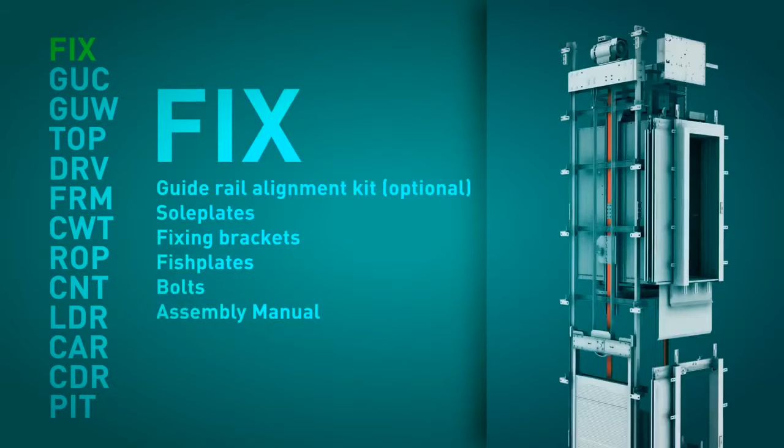Vita considers the installation of an elevator as a sequential assembling process of elevator subcomponents. It is for this reason that the parts of Vita's elevators are carefully sorted and supplied in modules. By module, we mean the group of components which, once assembled, carry out a specific function within the complete elevator.

Each module can be made up of one or more packages. These packages are identified with a description of the module and its position within the assembly sequence. The supply of the elevator has been designed to fit what we consider to be the logical assembly sequence of a machine roomless elevator.

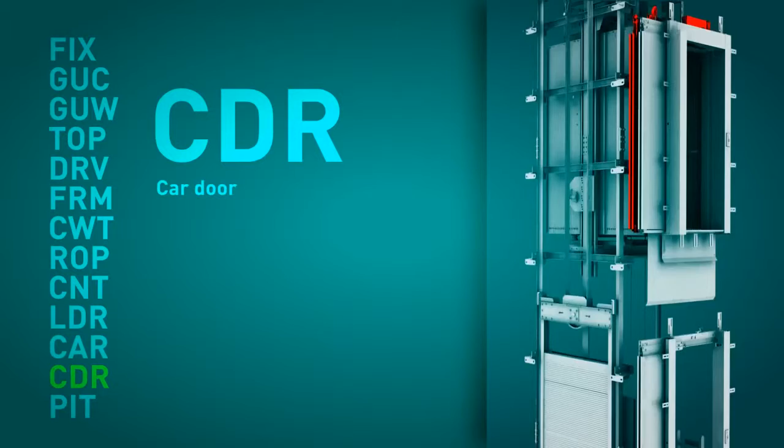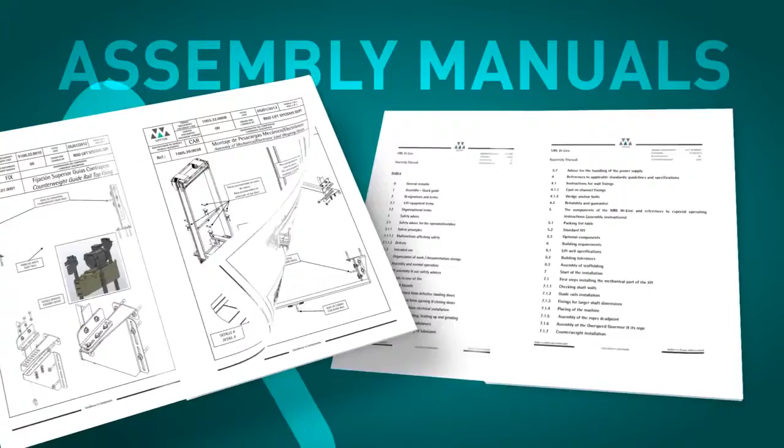The package that we have to open first is labelled and easily identifiable. Attached to this package, in a protective plastic cover, is the packing list and a document which details and lists the material supplied in each of the various modules. In this first package, we can find the assembly manual of the elevator and all the assembly handbooks of the individual components. Before starting the assembly process, we strongly recommend the assembly technicians read all the manuals in detail.

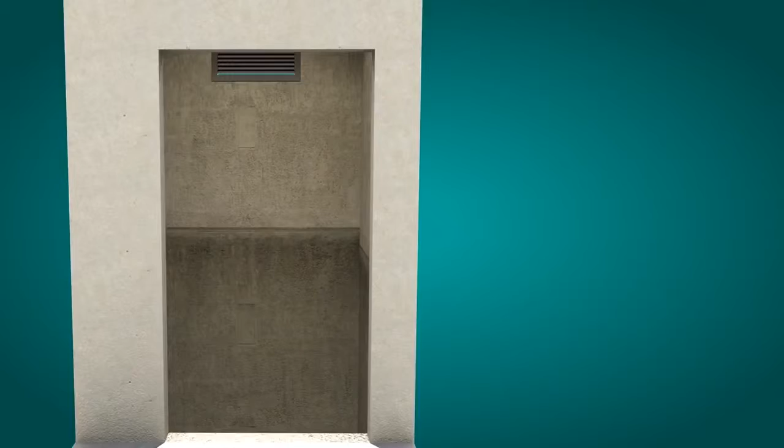The assembly of the MRL-W line starts by checking that the conditions of the shaft, dimensions, cleanliness are satisfactory and that all the necessary material and auxiliary tools are available on site. The guide rail sole plate must be correctly positioned and levelled according to the assembly manual.

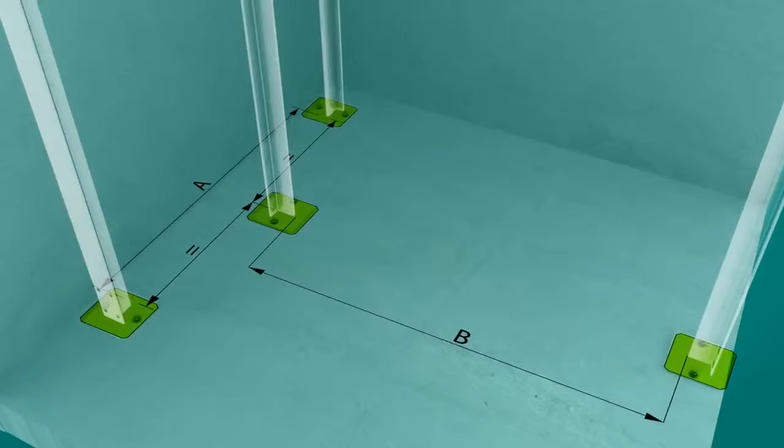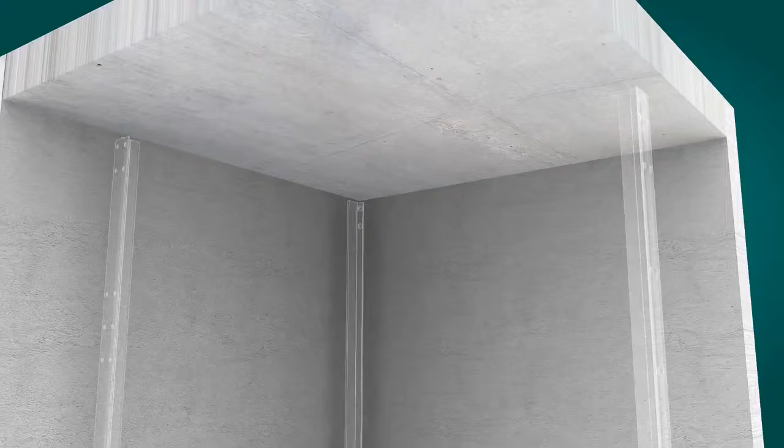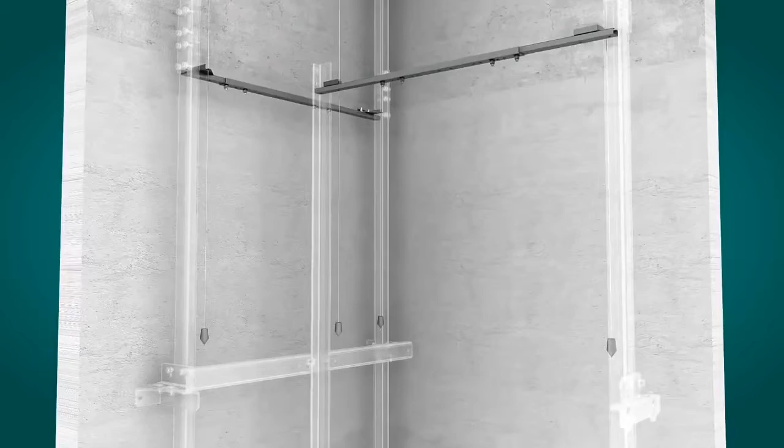The bottom portions of the car and counterweight guide rails are cut and assembled according to the installation drawings. Should there be a difference between the pit depth given in the installation drawings and the as-built depth, the bottom guide rail can be adjusted and cut to the right length. A tool to help align the guide rails is recommended in order to guarantee a correct assembly. Vita can supply a guide rail alignment kit upon request.

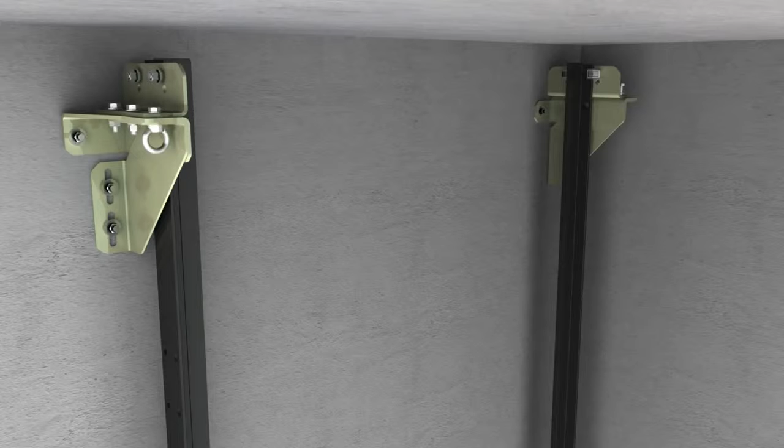The first row of guide rail supports is assembled. Their position is detailed in the installation manual. With the help of some scaffold platforms, the successive guide rail portions, 2.5 meters or 5 meters, are assembled with their corresponding support brackets. Once the last section of the counterweight guide rail has been assembled, the topmost bracket can be fixed into place. The last portion of the car guide rail fixed to the bed plate is assembled once the machine support has been installed.

Alternatively, the process of assembling the guide rails can be carried out from a temporary platform which is fixed to the guide rails that have already been mounted and lifted up through the shaft by means of a block and tackle.

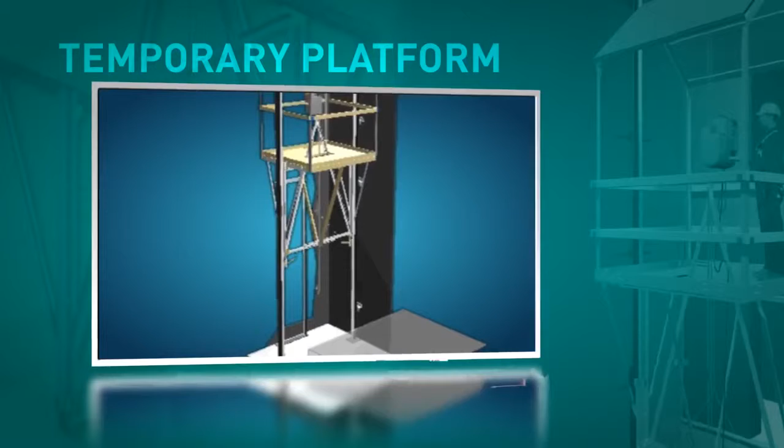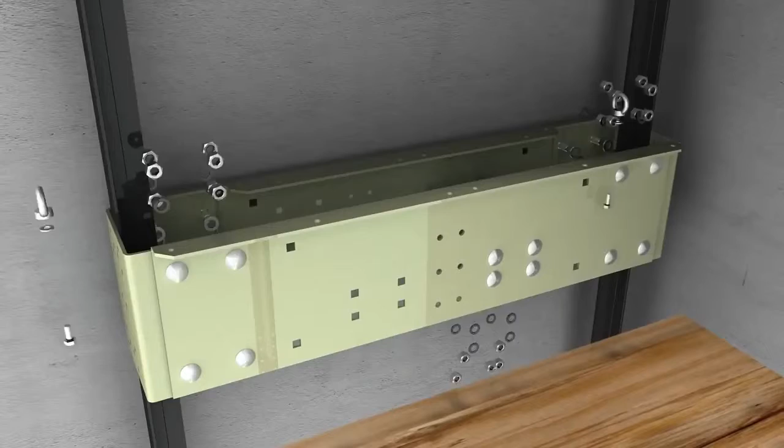The machine bed plate is assembled next. A comfort kit is standard supply for 1.6 meters per second, but optional, though highly recommended, for 1 meter per second. These low-frequency metallic cushions absorb any vibrations that the system may produce.

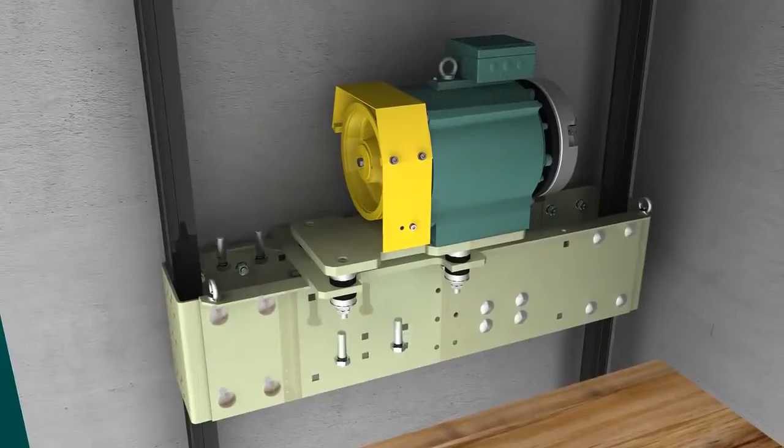The machine is fixed to its support and is lifted and guided into position with the help of a block and tackle. It is fixed to the sheave side with the fixings provided, and once the machine is level, these fixings and the clamp can be tightened. Once the machine is in place, the penultimate guide rail support and the last section of car guide rail fixed to the bed plate can be assembled.

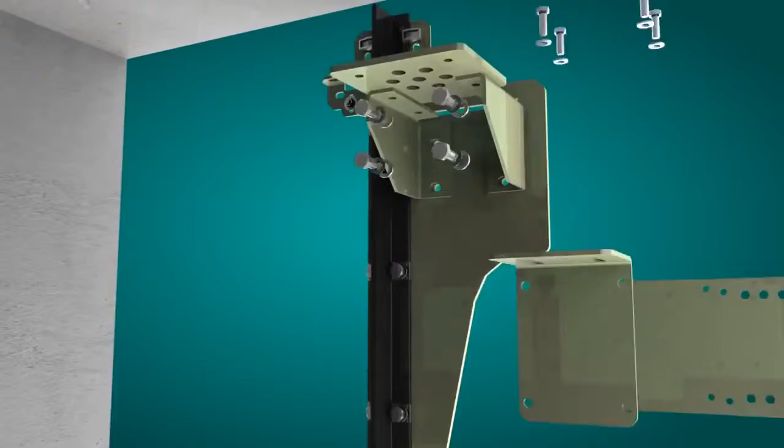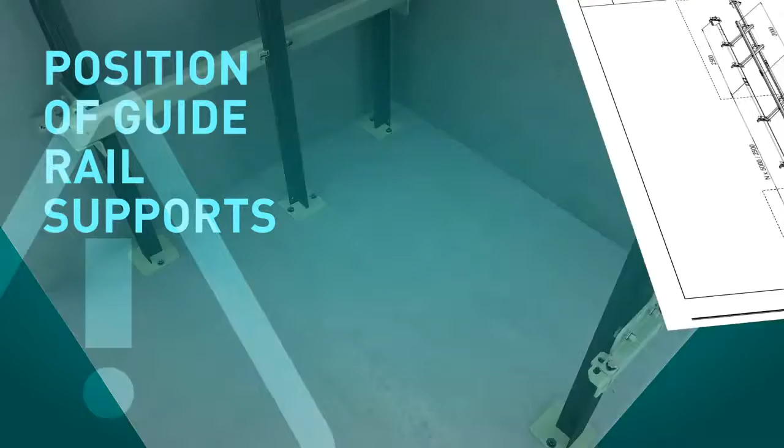The dead hitch point can now be assembled, followed by the overspeed governor and the slack cable control device, should it be applicable. At this point, all the mechanical elements of the elevator are assembled in the headroom. All the guide rail supports must be placed in the positions detailed in the installation drawings. The position of the top and bottom brackets is of special importance. Any scaffolding and platforms should be removed at this point.

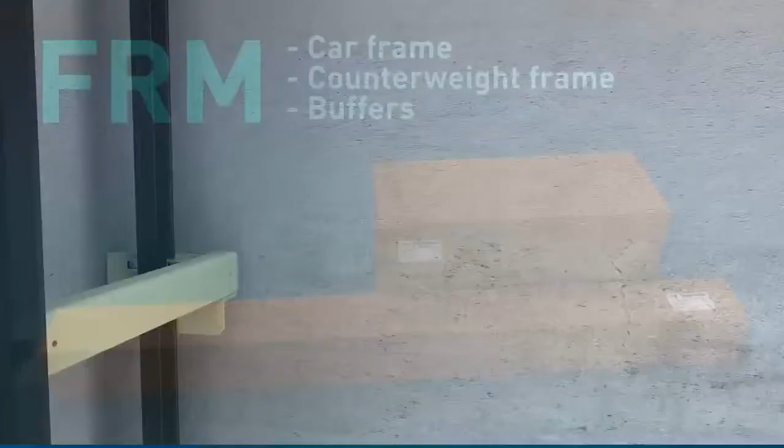It is now time to go into the pit. In the module FRM, we will find all the components relating to the car and counterweight frames and the buffers. The counterweight buffers should be assembled first of all in the position detailed in the installation drawings. Resting on its buffers, the counterweight frame is then assembled.

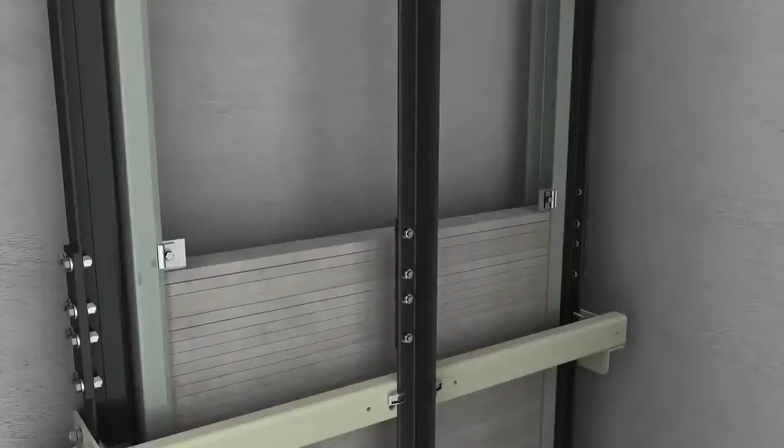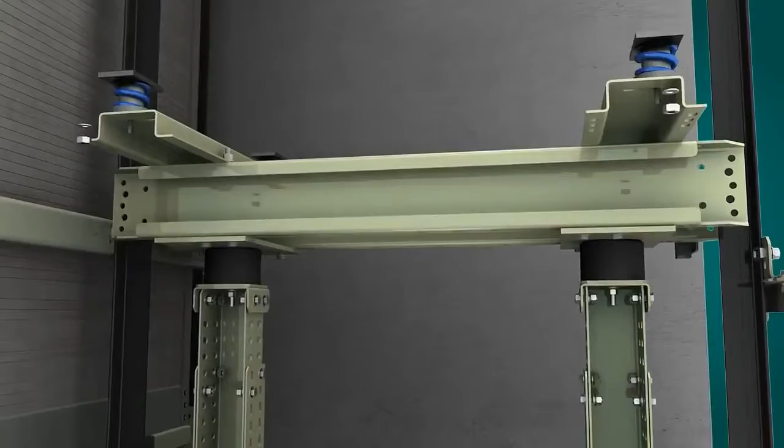A partial loading of the counterweight should then be carried out, according to the individual assembly requirements of each elevator. The car buffers are assembled next, in the position detailed in the installation drawings. Resting on its buffers, and on the car floor, the car frame is assembled. As an optional accessory, Vita offers a temporary protection to protect the car floor whilst the assembly process is taking place.

The slings are now correctly assembled and positioned within the shaft and between the guide rails, and it is time to suspend the car slings in order to assemble the traction ropes. All the necessary material is supplied in the module ROP. The machine should previously have been connected to the power with the encoder cable.

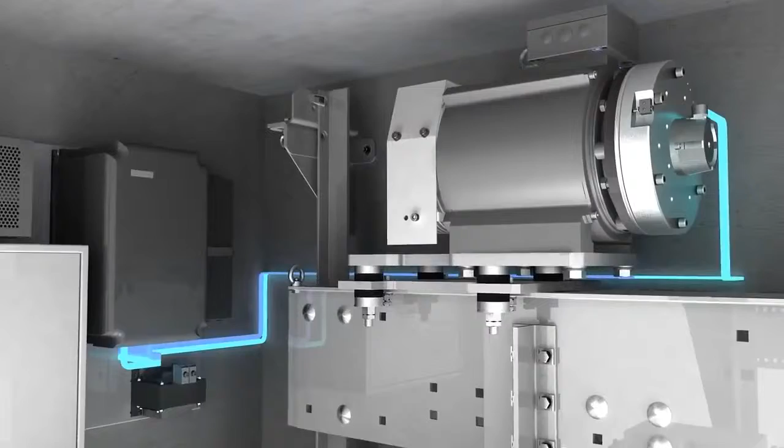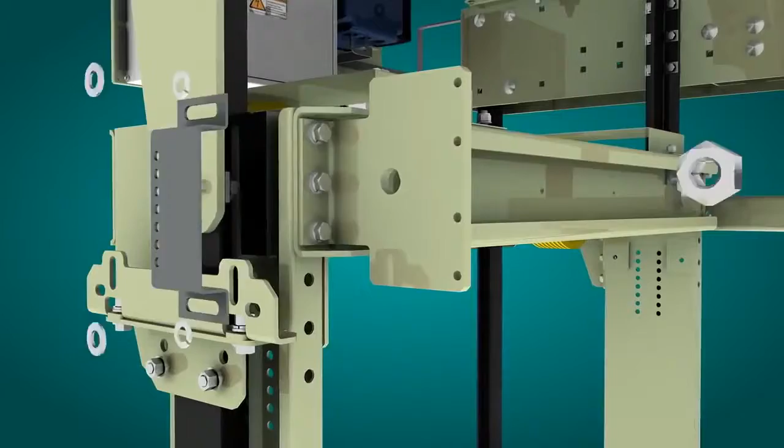The car sling is then lifted with a block and tackle to the highest floor that allows the floor of the car to lie flush with the landing FFL. Its position is maintained by means of the car frame locking kit. This element has not been designed to specifically suspend the car, but to fulfill the function indicated in clause 6431 of the standard EN 81-1+A3.

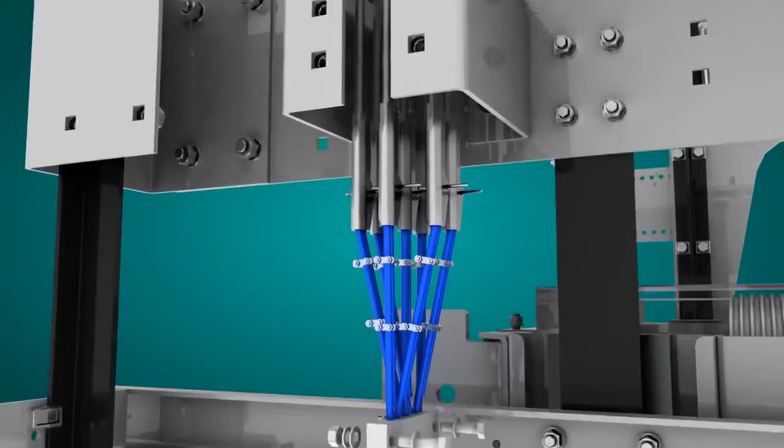For the assembling of the traction ropes, please follow the instructions detailed in the elevator's installation manual. Repeat the process as many times as needed. A rope clasp guarantees the correct alignment of the ropes as they are fed into the grooves of the sheave.

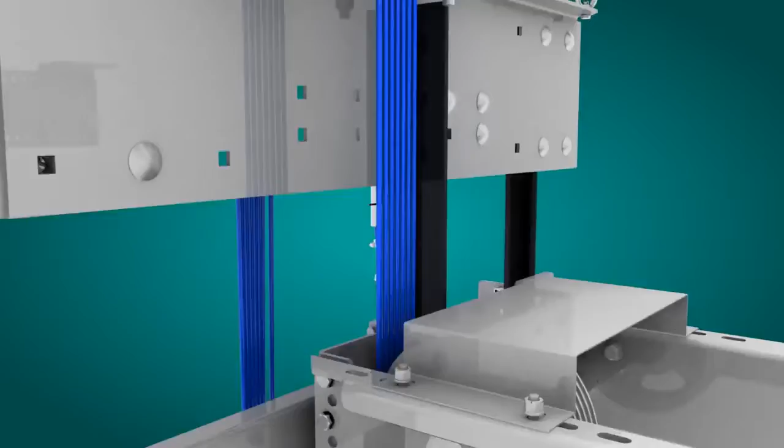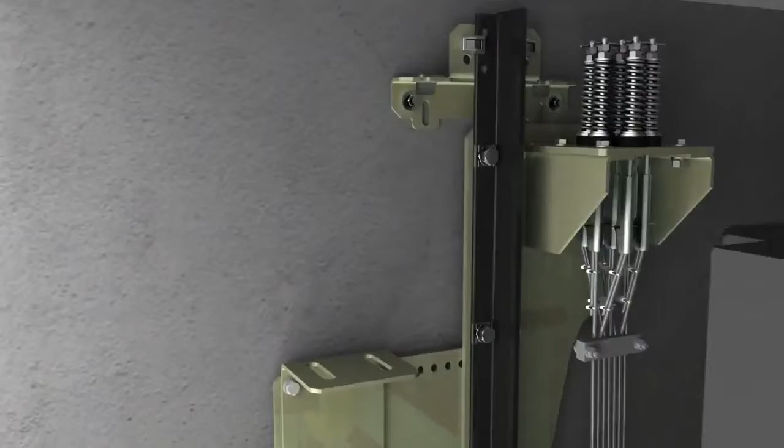The next step is the assembly of the overspeed governor, its tension weight and the cable that joins them. The fixing of the overspeed governor cable to the frame is the last stage of this subassembly. At this stage, the elevator can be used as an elevating platform with the use of an assembly operating panel. The elevator must be handled with great care during these journeys. With the help of the elevating platform, the landing doors are assembled.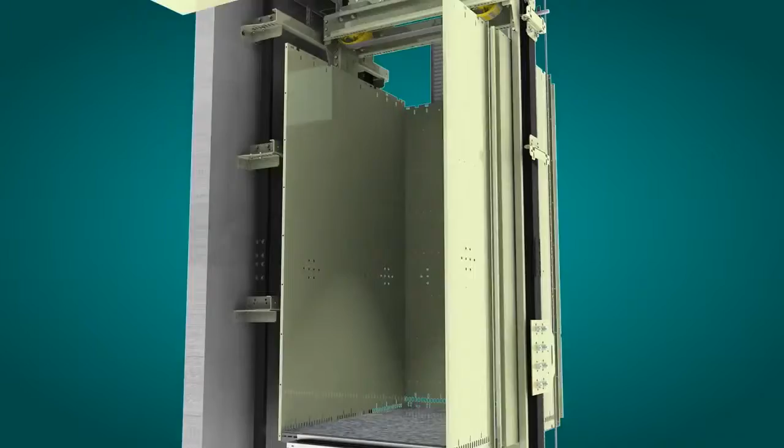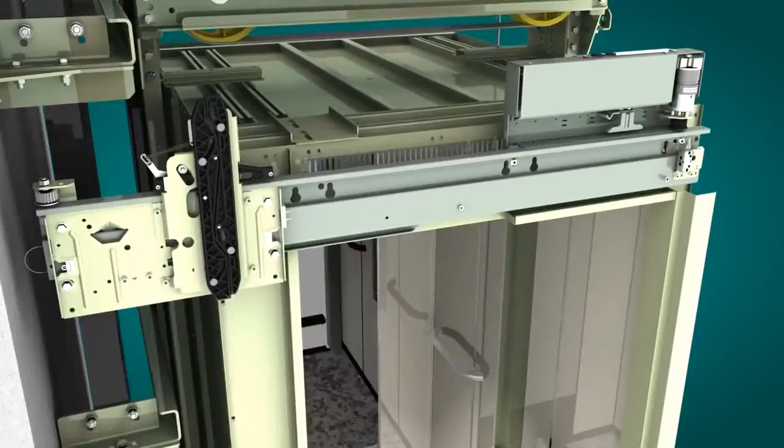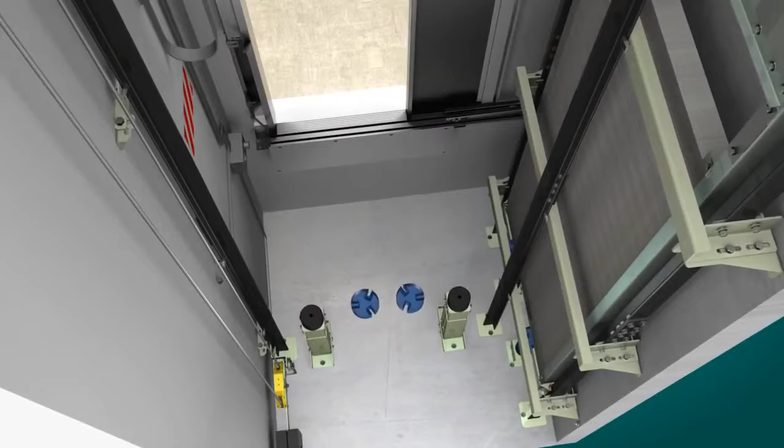Before starting the assembly of the car, it is essential to mechanically block the car frame and to remove the floor protection should it have been used. It is now time to assemble the car door. The pit components can now be put into place. The counterweight screen is fixed to the guide rails, and should it be applicable, the pit ladder is fixed inside the pit. From this point onwards, the electrical elements can be assembled.

The MRL-W line controller, with its plug-and-play concept, is probably one of the market's most easy and intuitive controllers to install. It is delivered perfectly packed and identified in 4 packages: power and control, pre-assembled electrical installation of the shaft, electrical elements of the car, and the controller cabinet. In each of these packages there are various assembly kits, each one accompanied by a description of its contents and an assembly manual, numbered according to the assembly sequence.

The controller cabinet, with its reduced dimensions, is placed neatly in front of the frame of the landing door located on the last floor. The simplicity of the controller does not reflect its features. The MRL-W line controller can be supplied also according to other standards, such as EN 81-70 and EN 81-73. Upon request, it can also be adapted to the EN 81-71 and EN 81-72.

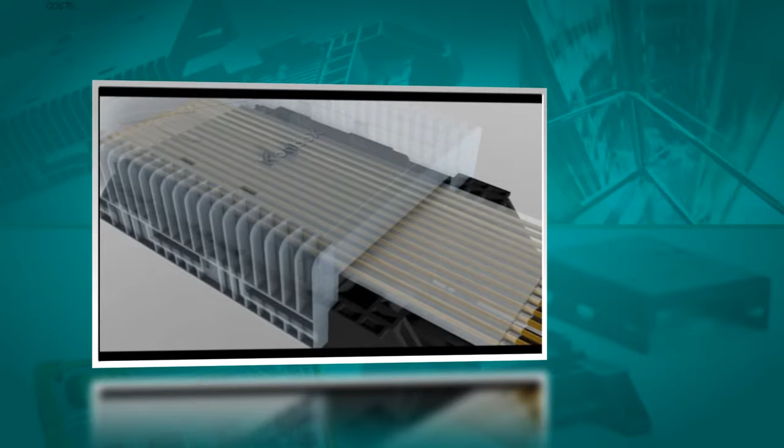Our pre-assembled electrical installation uses the CON-box system, which greatly reduces the assembly time, guarantees the quality of the CAN bus signals, and sets us apart from our competitors. The flat cable is manufactured with highly resistant and durable materials, which guarantee an optimal protection of the low-frequency CAN bus signals. An absolute positioning system of the car by means of a 4096 pulse encoder is optional. This makes assembly easier and guarantees millimetric precision of each stop.

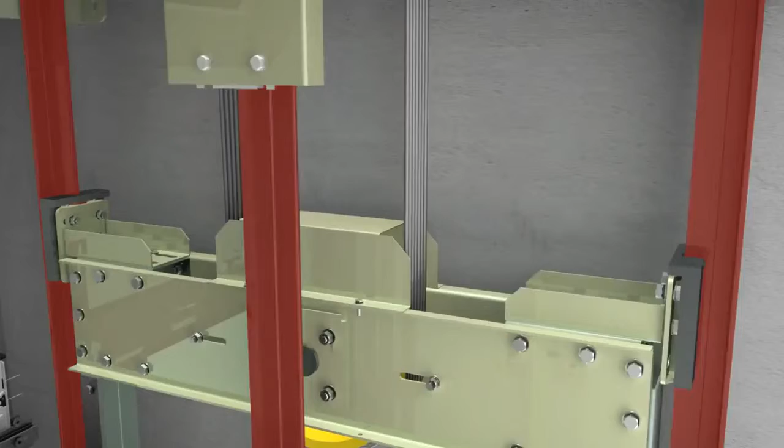The penultimate task is the important one of cleaning the shaft and the pit, and of oiling the guide rails. Finally, before the lift can be put into service, the MRL-W line must be submitted to a series of tests, according to Annex D of the EN 81-1+A3, in order to ensure the perfect functionality and safety of the lift. VITA supplies a specific document which guides the assembly technician through all the steps that must be carried out.

VITA has been issued by AENOR a conformity certificate, confirming the implementation and maintenance of a quality assurance system for the design, manufacturing, and final testing of elevators, and certifying that it complies with the requirements of Annex 13 of the Lift Directive 95/16/EC. This means that any assembly company with a quality assurance system compliant with the Annexes 12 Module E or 14 Module D of the Lift Directive 95/16/EC can put the lift into service and certify it accordingly.

VITA can also supply the necessary documentation allowing any assembly company without a quality assurance certificate the possibility of certifying the elevator through an external notified body according to Annex 6.